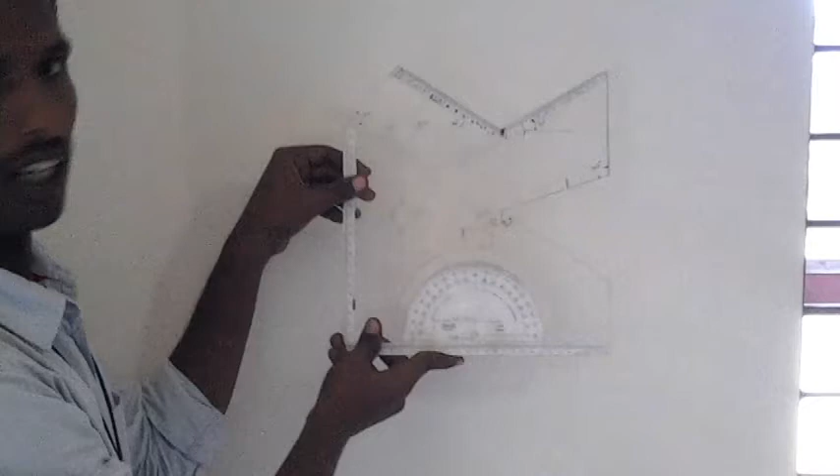Now, this is called the Viswo Draft, which we have made. This is used for engineering drawing applications. We have demonstrated it by using this on the blackboard in front of the students. In actual practice, this much size was not required. So we have developed it in a 1:4 size, and this is the size of the actual Viswo Draft which we have made by using the injection molding process.

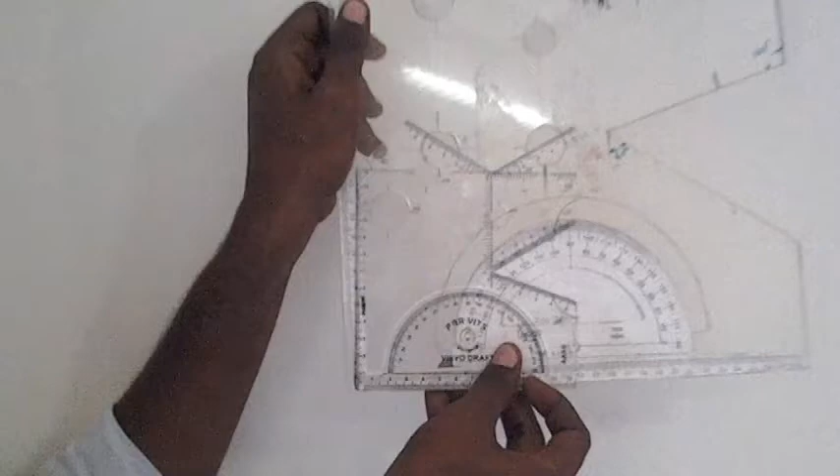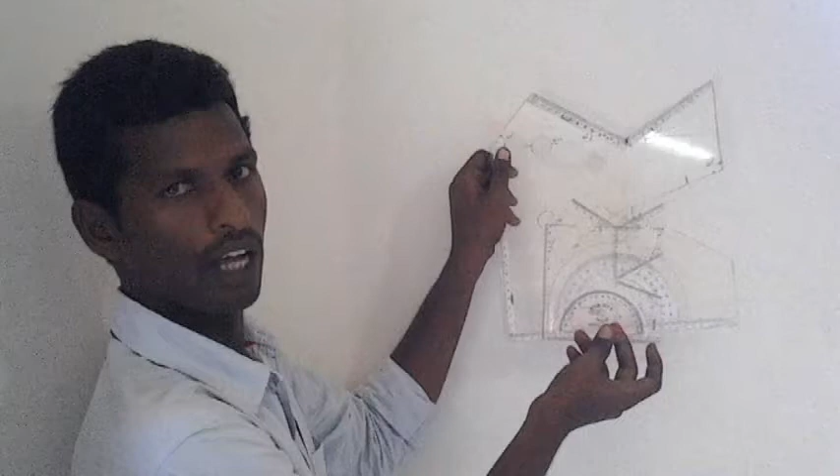The raw material we have used is polystyrene for good transparency and accuracy. We have made a die on a CNC milling machine for good accuracy. The remaining points will be explained by my batchmate Arunachalam. This is the actual Viswo Draft. I will explain what features it contains.

What are the features we have? First one is the protractor. No need of an extra protractor. And we have one horizontal scale and vertical scales and angles for polygons. What are the polygons we have used? Regular triangle, square, pentagon, hexagon, heptagon, and octagon.

Now the first polygon we draw is the triangle. The triangle angle is 60 degrees. We have provided 60 degrees from here. So take this one as a reference and draw these two lines, and you get the triangle. And the next one is the square. For the square we ultimately get 90 degrees, so the square will be developed.

And the next one is the pentagon. Pentagon is 108 degrees. Here we have provided 108 degrees. Take this one as reference and you will easily draw the pentagon. And the next one is the hexagon. Here we provide 120 degrees, so you will get the hexagon easily.

And the next one is the heptagon. The heptagon is not used, so we go to the octagon. The octagon angle is 135 degrees. Take this one as reference and we get 135 here, so you will easily get the octagon.

And the next purpose is isometric views, 3D views. 3D views means 30-30. Here we provided 120 degrees, so the isometric box is got easily. And the next one is pro circles. Pro circles need no compass, and they are very useful for small circles such as 10 mm, 12 mm, 22 mm, 24 mm, and 18 mm; we have provided these also. It is also easy to construct parallel lines.

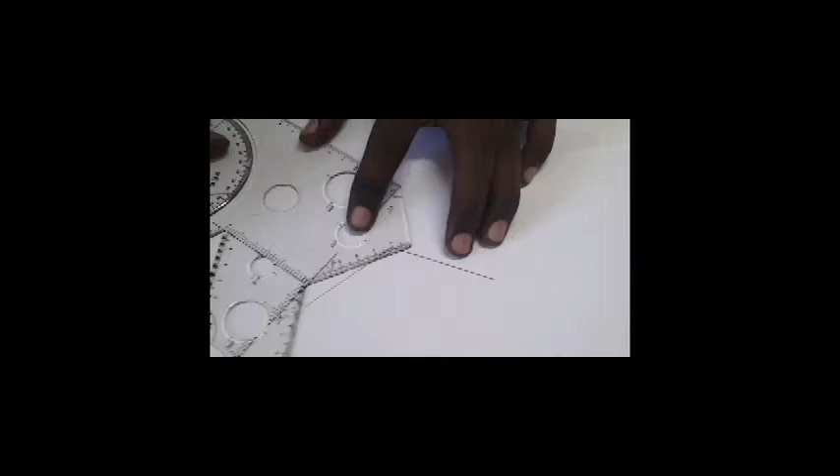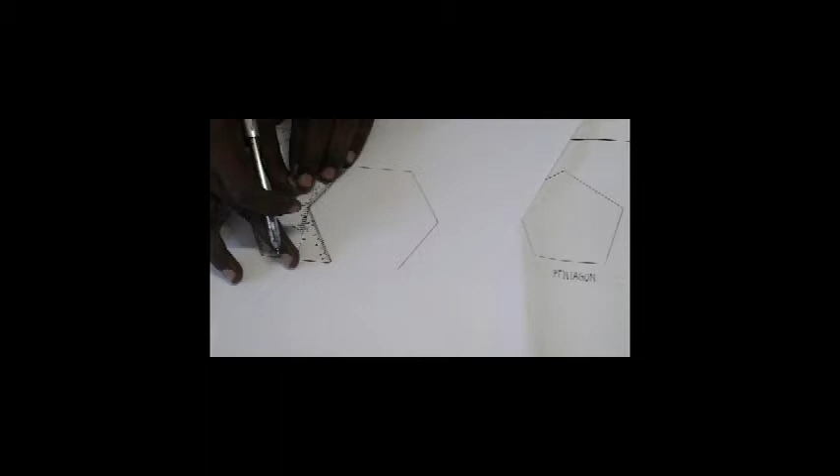And the next polygon is a hexagon, which has 60 degrees on each side, and we can draw it easily. Here we have provided 120 degrees, which means half of it is 60 degrees. We can draw it within 1 minute; with one view we can draw 2 angles, 2 sides at one side. Take this as a reference line, similar to previous polygons. These are the polygons which we can draw by using this Viswo Draft easily and very accurately.

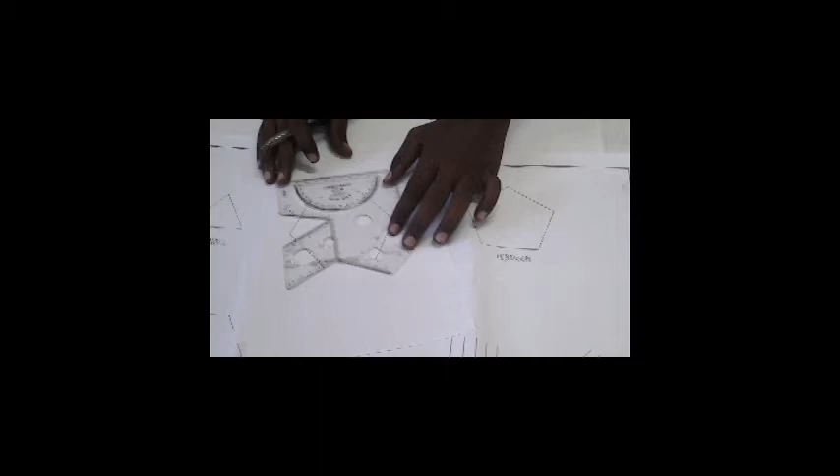And next are parallel lines. The main use of the mini drafter is the parallel line mechanism; it is mostly used for drawing parallel lines. By using this Viswo Draft, we can draw them easily by taking only a reference line. For drawing horizontal parallel lines, take this vertical line as a reference line, and we can make parallel lines wherever you want. These are the horizontal parallel lines we can draw by using this.

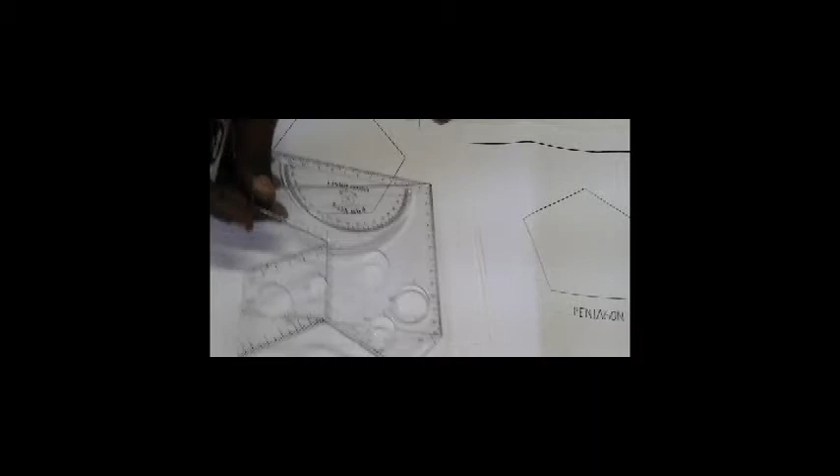Similarly, we can draw parallel lines for inclination angles by using this Viswo Draft. For example, we can draw 30 degree inclination parallel lines. Take a reference line here and draw similar parallel lines. These are the parallel lines. The isometric views and the ellipse will be explained by my friend Arunachalam.

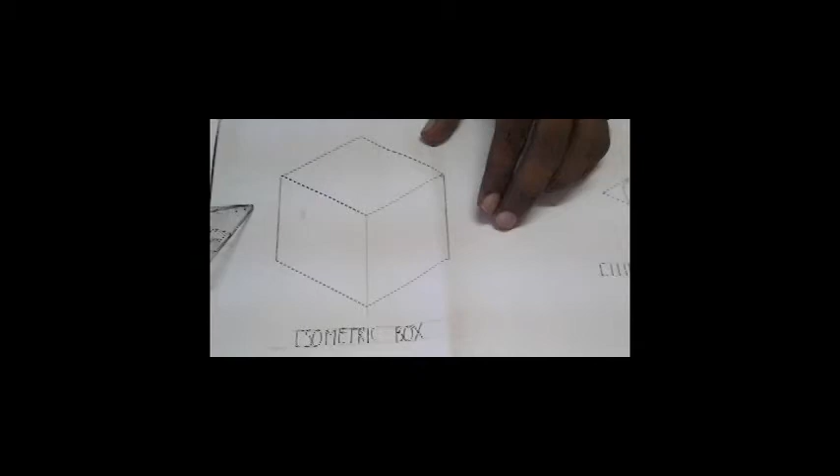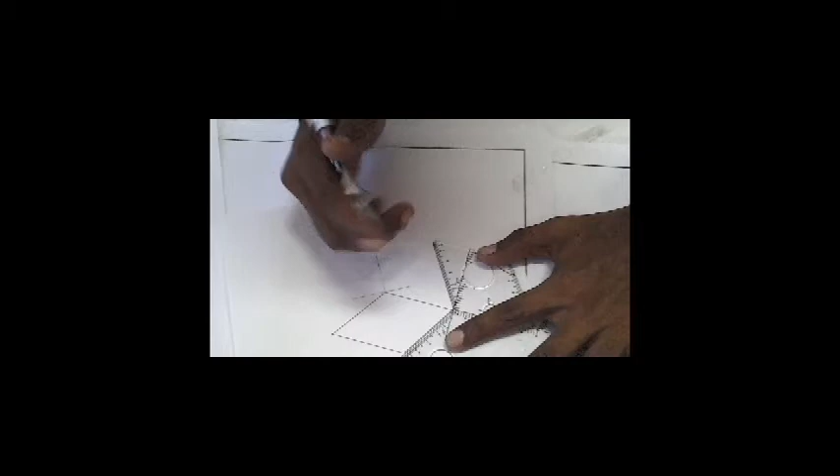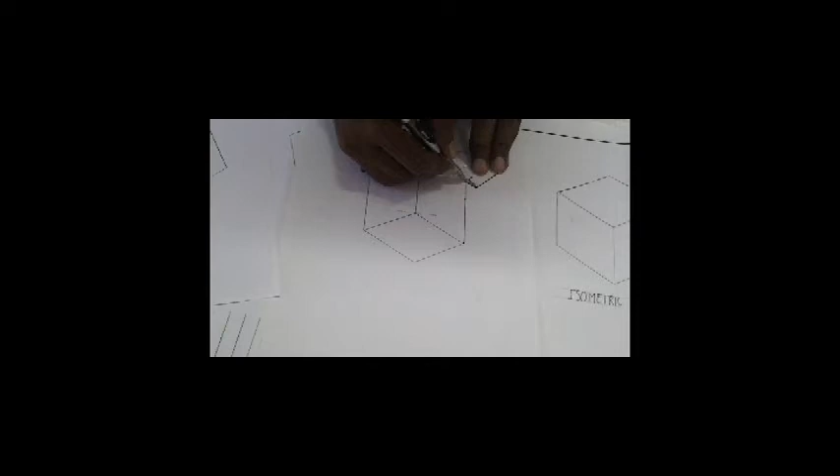Now I am going to explain how to use this Viswo Draft for the isometric box. This is your isometric box. Once you get the isometric box, all engineering drawing isometric views can be drawn. First of all, take any one as reference and put this onto this line. Here we provided 30-30, so this angle is 120. Rotate this one and keep it. Take this one as reference and draw the vertical line. Take this one as reference line and keep this one for this. Once you get the isometric box, you can draw any engineering drawing.

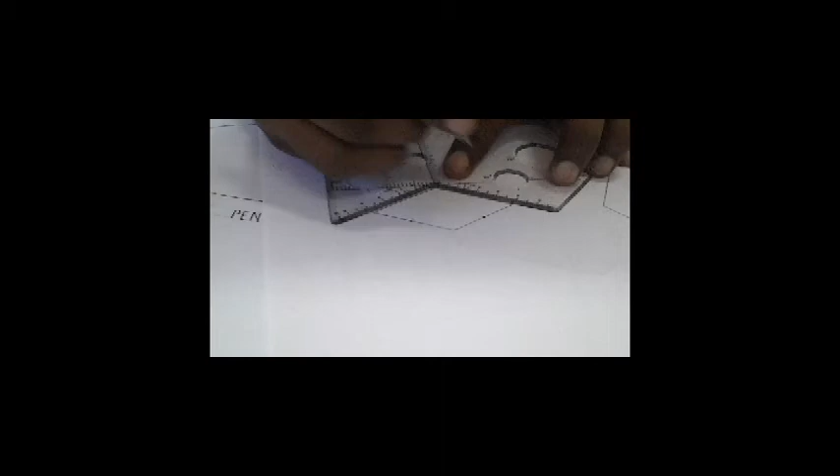And one more application is the 4 center method ellipse. First you draw 30-30. The 4 center method is used because in isometric view the circle is in ellipse shape. The 4 center method is easily drawn by using this mini drafter. Here we provide 30-30. Suppose you draw a 40 mm circle. First you draw 40 mm lines, take half of the sides, and join this one to this.

Taking a compass, take this one as center and draw this arc. Take this one as center and this one as radius and draw one more arc. Next, this one as center and this one as radius, draw one more arc. Similarly, this one as center and this one as radius, draw another arc. You can draw the ellipse by using this Viswo Draft.